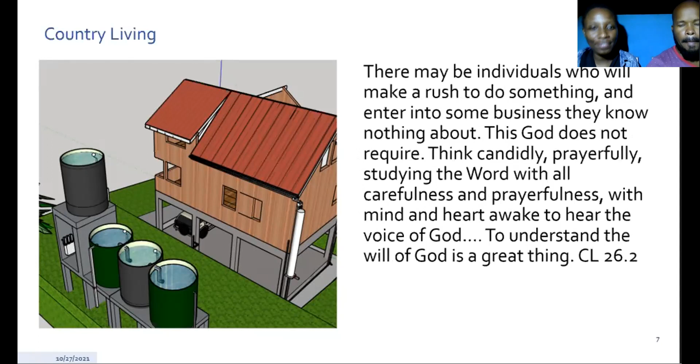So we see here that you should do the planning necessary, so that when the time comes, we have things already set up in place. One of the passages I love is this: not a move should be made, but that movement and all that it portends are carefully considered.

This is why we're doing this session as well. We want to show people there's a lot to consider when moving to the country. It's not just let's move and all is going to be all right, God is just going to miraculously provide. No, we need to consider all the movements and all that it portends, everything that it entails.

Rain harvesting is one of them, so let us start considering it. Let's get into it now. You have me in suspense. All right, so let's get into it.

One more passage before we go. More and more as time advances, our people will have to leave the cities. For years we have been instructed that our brethren and sisters, and especially families with children, should plan to leave the cities as the way opens before them to do so. Many will have to labor earnestly to help open the way.

And we have said, yes Lord, we want to labor earnestly to help open the way for families to move out of the city into the country, into a place where, let me tell you, that location we were just at, that river, we can stay there for days. That's why we were late to get home again.

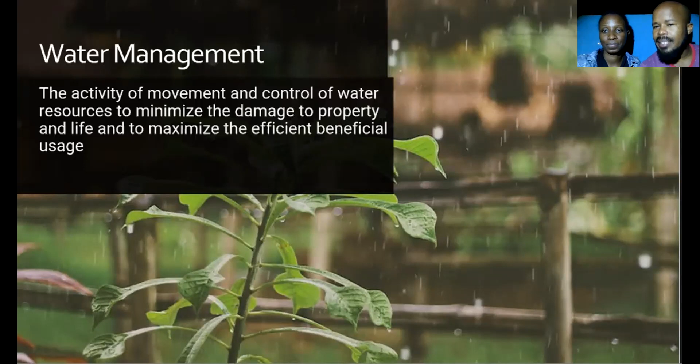Water management is the activity of movement and control of water resources to minimize the damage to property and life, and to maximize the efficient beneficial usage. So use it for your benefit and mitigate the damages it may cause if left on its own.

Water is extremely important, and that is why we need to observe it. The first thing we stated is we need to observe how the water operates on the property so we can know how best to make the interventions or changes we would like to make. For example, we looked at the entry points of the water, the exit places, where it's collecting if any, whether it's slowing down in any area, drying quickly in some areas, or moving quickly.

And if it's moving quickly, we may find erosion. So these are some of the things we looked at. One thing we observed is that when water moves too quickly through a property, you can have erosion, and we do not want that. Instead, we want it to slowly sink into the soil. This is one of the things we saw yesterday. When we assess what we're noticing on our property, we have to assess our water needs.

How much water do we need to do the things that we need to do? Is it only for recreational purposes, or is it only for agriculture? Do we have an industry that requires a lot of water? We're going to be looking at aquaponics tomorrow, so then we can adjust our understanding of how much water we would really need. This is something we have to take into consideration as we are observing the water on our country properties.

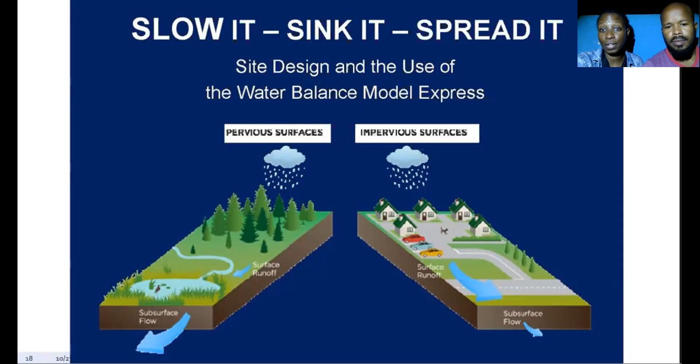So as we realize this is what we aim to do, the reason this is our aim is because we would like to have green forests and green gardens. So we can store the water, as we said, under in our aquifers, or we can store it above ground. And that's what we're going to do today.

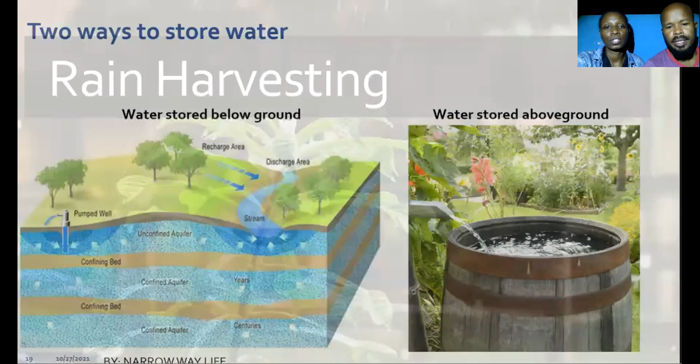So today we're going to look at rain harvesting, which is storing water above ground. Yesterday we looked at storing water below, which were our swales, where we can allow the water to travel and spread on the land through the contours, able to sink in to more areas than if it was just settled in one particular area. So tonight we're going to look at rain harvesting.

So I just put the definition. Rain harvesting is the collection and storage of rain rather than allowing it to run off. It's the collection of rain instead of allowing it to run off. Rain harvesting is the collection from a roof-like surface, and directed to a tank, cistern, deep pits, well shaft, borehole, or aquifer, taking the water and storing it for your usage. That's basically the idea.

Now, it's different from stormwater harvesting, because stormwater would mean that the water had already moved across the land and maybe even done damage to some of the places. So, one look at rain harvesting.

Now, in harvesting water from the sky, you can also harvest dew. There's dew harvesting as well, in places that have deserts. However, sometimes in the day, maybe dawn and dusk, or in the evening, there is dew that's moving around. So there's a way to harvest that dew.

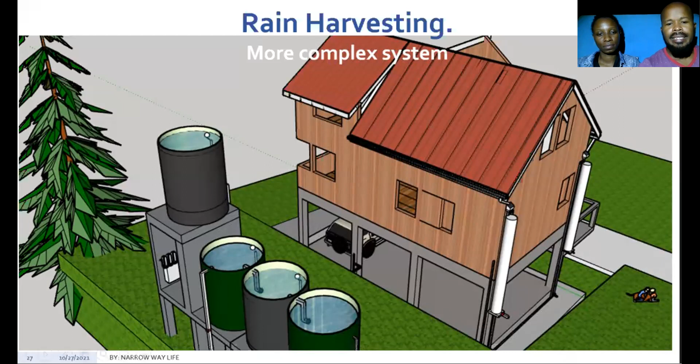So here's a simple diagram of a more complex rain harvesting system, and I'll explain it as we go along. Here we have the roof, and here we have a leaf eater or leaf diverter. Then you have a first flush system - that's where the bulk of the dirty water gets diverted - then you have your storage tank, and you pump it through a filter into your house. It's a little more complex than just guttering, but we can get even better systems than that.

Let me explain the parts of the rain harvesting system so everybody can understand. I won't explain a roof, I believe everybody knows what a roof is. If you don't know, this is a rain gutter.

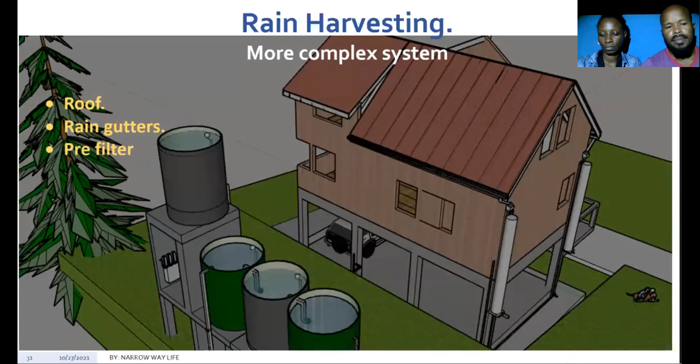Now, a pre-filter - this is a picture of a pre-filter. The benefit of a pre-filter is, one, it shuts your system, so then you have a closed system where nothing other than water or tiny particles can get in - no mosquitoes, no leaves, no debris. That's a closed system. The pre-filter comes after the rain guttering, going in order - after the guttering you have your small downspouts, then the pre-filter is the next thing. You could have covered pre-filters or pre-filters that are uncovered.

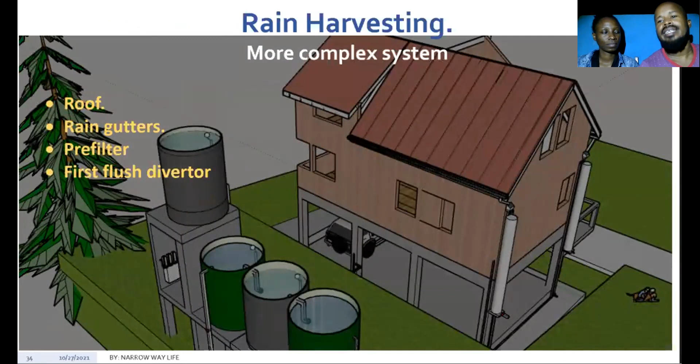So the next part of the system we want to look at is the first flush diverter - I'll say it again, a first flush diverter, and it looks something like that. What is it supposed to do? Divert the first flush. So what is in it?

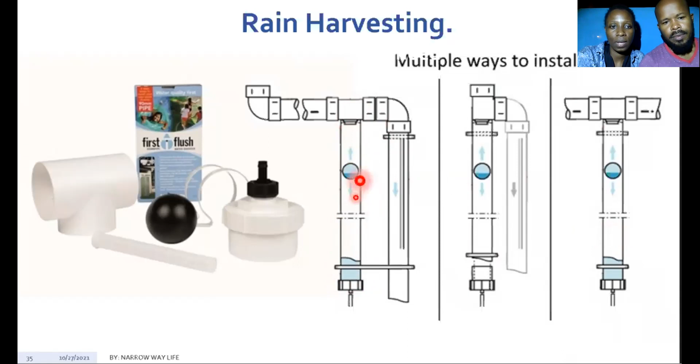So if you understand the concept here, the purpose of the ball is to block this opening when this chamber is filled. So it has to first allow water and debris to go around, but it's supposed to block this at the end. That's why I like this picture more, because it shows the ball floating.

But that chamber, you need to be able to drain it from the bottom, man. You need to be able to flush it. That's why they call it the first flush system. So every time it rains, you need to be able to flush off that system and get that water out.

And this is where it comes in handy for your gardening purposes, because that would be a nice little compost tea with your leaves. Well, not maybe compost tea, but it's nice water for gardening, because there's a lot of minerals in there.

So next you would need... One question: why do you have the drums that distance, like about 15 feet or 10 feet, from the house? Oh, from the house? No, there's no reason why I have it that far from the house. That's just how it's designed for what our home kind of looks like. You just don't want it resting on the wood of the house, because it would cause mildew to build on the walls.

So the distance is your choice. You just don't want it to splash water onto the wood. That's about all. And the pipes for it are actually running underground, but we'll get to that. We have a 3D demonstration of that, so you're going to get to see it in detail. But thanks for the question.

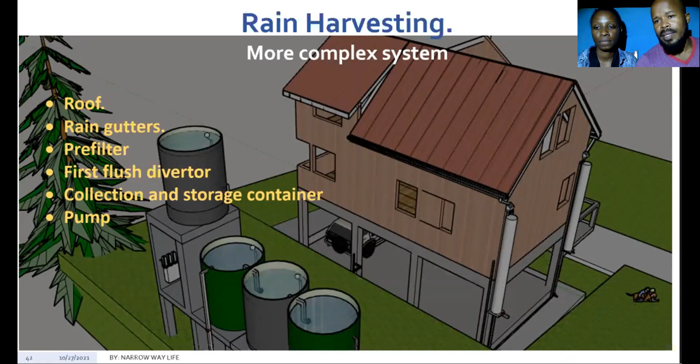We need a pump. If you're going to run micron filters, that's coming up next, you need a pump to be able to run the water through the filters, because gravity would take a long time to get the water through that filter. Also, if you allow gravity to do the work for you, that means the tank after the first tank would have to be lower. And if you lower the water, then you have problems using gravity to get it where you need it to be. But we'll get to that in a while.

We also have a well pump—yeah, that's a well pump, where the bottom of it is submerged in water. It hangs down all the way into the water, and when you turn it on using the wire, it pumps the water back up through a hose, so you could have water. That pump can be submerged in the water.

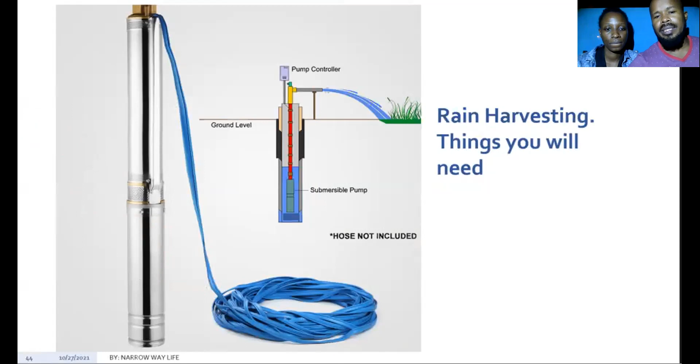So why do you need a pump? You need a pump if you are going to run micron filters—filters that take out the things you cannot see. We'll get to filters in a while. You need a pump to be able to pressurize the water through the filter, and the better the filter, the more pressure it takes to run the water through. There's ceramic filters, and micron filters, but we'll get to that.

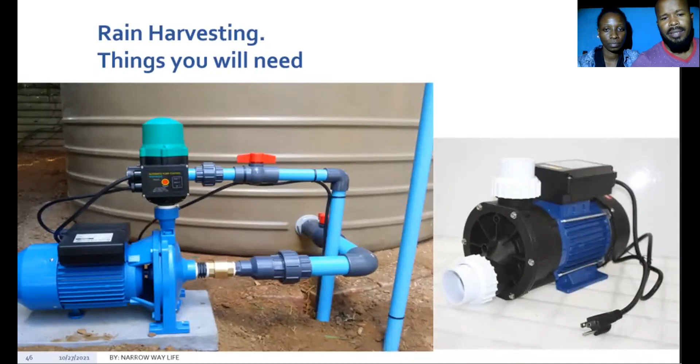Now, in your rain harvesting system, what's that? I'll look at that.

It has a filter in the straw, so when you drink the water, it filters it through the straw. That's just one of the types of filters that they provide.

So now we go to storage tank, which I already explained. The most important thing about a storage tank - well, two things I must say, but I think we don't have that problem anymore - you need a special coating of plastic that they put inside the tank. However, if you could get stainless steel water tanks, that's ideal. However, I've never seen it in St. Lucia.

So you do with what you have. You do not say, I'm never going to drink rainwater, I'm never going to harvest water because I can't get what is ideal. Until you get what is ideal, use what you have, because it's better than pipe water anyway, since the pipe is actually made of metal that corrodes. Other than that, you need your pipes and fittings to connect those individual parts together.

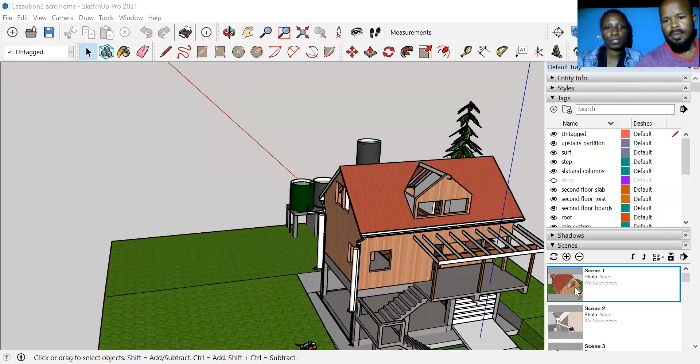There we go. Okay, so can everybody see the screen? Jump in. How would you know - can you see them? Yeah, you can see this. Yeah, you can see the hand?

All right, so I'm going to explain the system and you're going to see the setup and all the connections in between. Ready? So as we explained, we start with the roof, and then the water gets into the gutter, and from the gutter we have the downpipe, and the water then goes through this pre-filter.

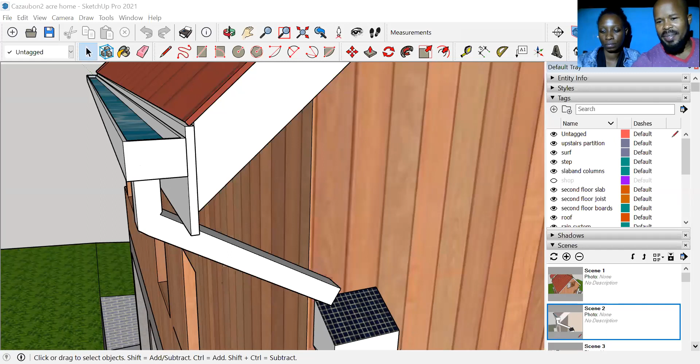Can somebody tell me the purpose of the pre-filter? Oh, we have a hand. Okay, go ahead. When I think of the purpose of the pre-filter, I think it's to remove all the trash and debris. Yeah, the leaves and stuff, debris. Okay, right, wonderful.

But I wanted to mention before, when you were questioning stainless steel - a stainless steel drum is like buying a house, right? I didn't know that. No wonder we don't have it in the Caribbean - it's very expensive.

Right, very expensive. And with the plastic drum, if you're worried about chemicals, in my estimation the charcoal filter would be ideal, applicable in removing 90-odd percent of whatever you might be concerned about, rather than having alkaline water. The UV filter would have to be changed once a year.

Right, so I'll just make note - on your roof, if it's a steep roof, the gutter would have to be wide enough, because your collection will run off and run over and not go into the gutter for such a steep roof. And let me add, a steep roof stays clean for longer too, because debris wouldn't stay on it. But I'm explaining that when you're building with a steep roof, you have to go with broader gutters so you catch the excess water into your tank and get the drippings in the tank.

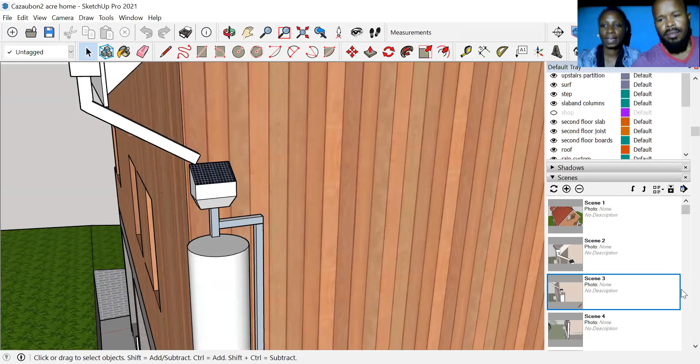All right, very good. Yeah, thanks man for sharing, bro. Thank you for that. I see you're really into country living, so I like that. Thank you, I set up my water system, but I don't... Oh nice, sophisticated how you set it up. Okay nice, right. All right, yeah I'm good. Any other questions?

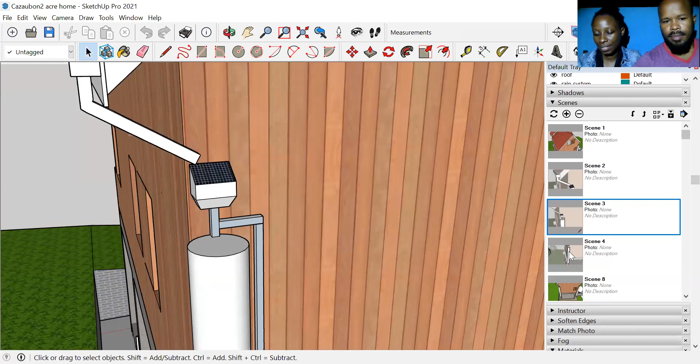So on this roof, I have two systems, one on the left, one on the right. They're both connected to each other. However, I treated the two sides of the roof separately, and I gave each of them a filter, because redundancy is better. If you have only one filtration system, since the roof is the source of the water, and that one pre-filter system goes down, then my entire water harvesting operation is out. So I have two of them.

Here you see the example of a small first flush filter. I have a way bigger first flush filter, because I want to be able to take a lot of the rain and a lot of the things that I don't want to drink out of the system.

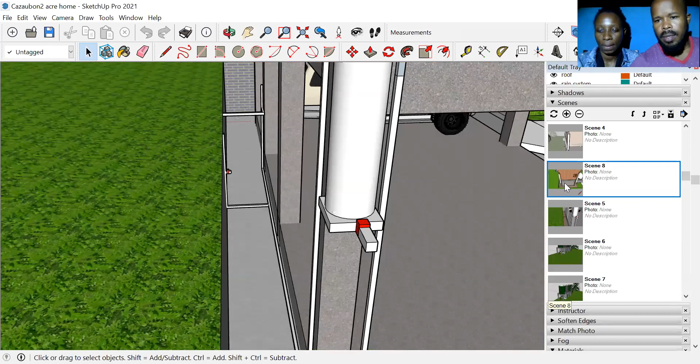Can you repeat the question, please? Or you could post it in the chat. Okay, no problem. Okay, yeah, it was a mistake.

So now that we have the water in the first flush system, we need to get it out. Here's the first flush system right here. If you can see the mouse, it's on both sides of the roof. However, the pipe—let me zoom in there.

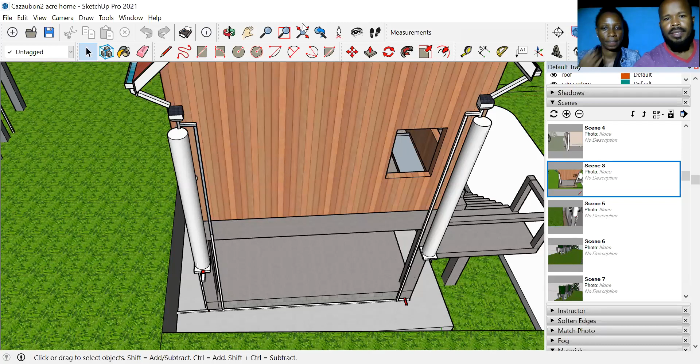Right, so they're all connected at the bottom there. Now, it is very important to be able to shut off every part of the system for whatever maintenance you need to do. These red symbols are just a symbol—I didn't want to go through the whole hassle of drawing an actual pipe head and everything, that's a lot of work. So every time you see red, that is a valve, to be able to shut off the system. So if I need to work on the tanks, or cut a pipe here, I need to be able to prevent the water in the tanks from backing up and coming back out, so you need to have those.

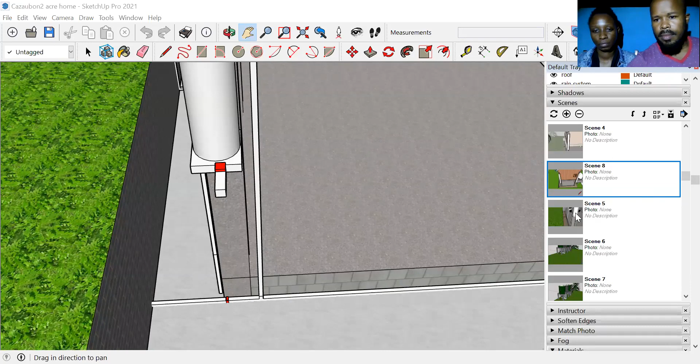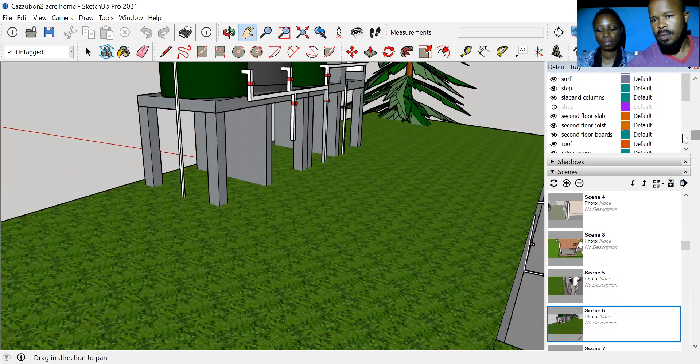You see where it's critical? You don't want those red lock-offs to be on your main tank for flushing. You need the metal ones, because these plastic ones tend to not work so good after being in the sun. But it's still according to what you can find where you are too. I'm just saying the main part, the one that comes out of the tank to feed the rest of the system, you want to at least try and get even one of them as a brass lock-off. It's a bit more expensive, but when you consider that if anything should happen, these plastic ones don't work as efficient as the brass ones, especially if you have thousands of gallons of water there—a lot of pressure, it's important.

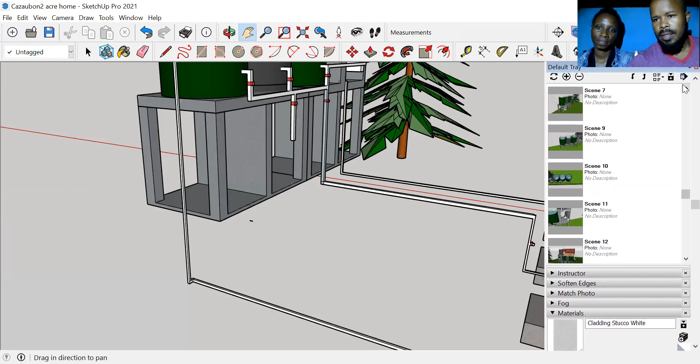Right? And another thing too, where did I go? Another thing with... oh, it missed me. When I get it back again, I will tell you. All right, no problem, thank you so much for sharing. It missed me a while ago. All right, but it will come back.

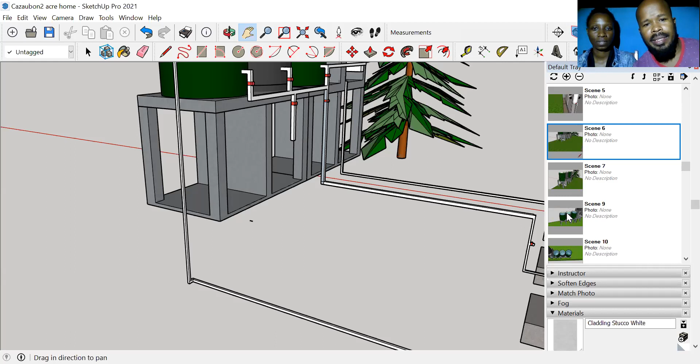Okay man, so from the house we have a first flush system. This is actually the ideal system that I want. However, our system only has 2 tanks. So then the water comes into this first tank. Now this water is still not drinkable—yes, it went through the pre-flush filter, but there's still stuff that would have gotten through. So this first tank of water is what I would use to water my garden, wash the vehicle, flush the toilet if you have a flushing toilet, and do other things that don't require clean water.

Maybe even wash clothes with that water. So that water goes into that tank. Have a view from up there? Yeah, from up.

So the water in that tank, if you look closely, the water comes in through the tank, fills up, and I only take water from the top. If you notice, when the water fills up and gets to the top here, I have to be able to show that. Let me see. Here we go. Yeah, that look.

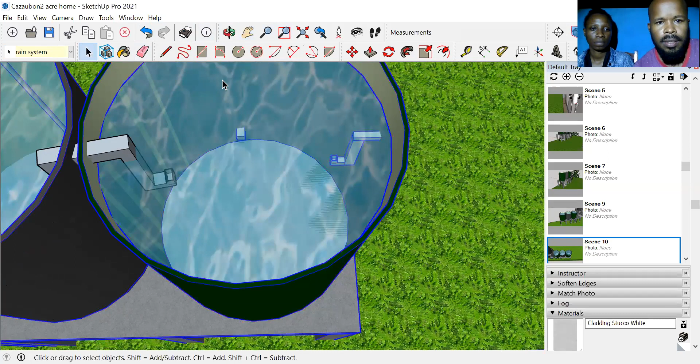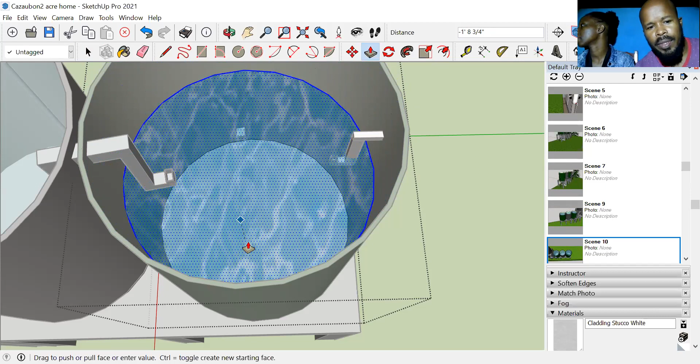So when the water fills up, it will continue to flow into this tank until it gets to where the water is no longer able to go into the system. As long as the other side of it is submerged under water, the water will continue to sink down until it gets there. Now, I can only use the very top of the water to go into the tank.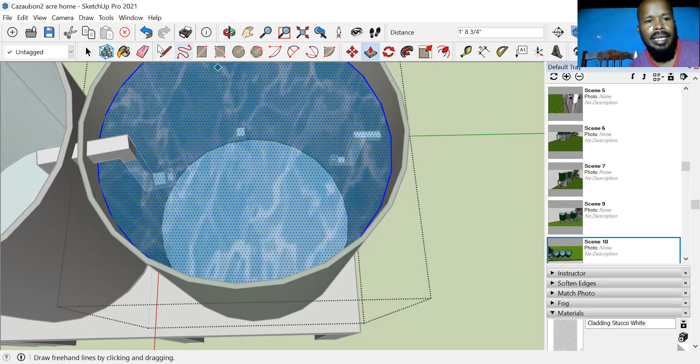So whatever came into the first chamber, whatever debris made it through would settle into the bottom, and that I'll use for the garden. So only the cleanest of the water when the tank is full would make its way into the second chamber on the other side.

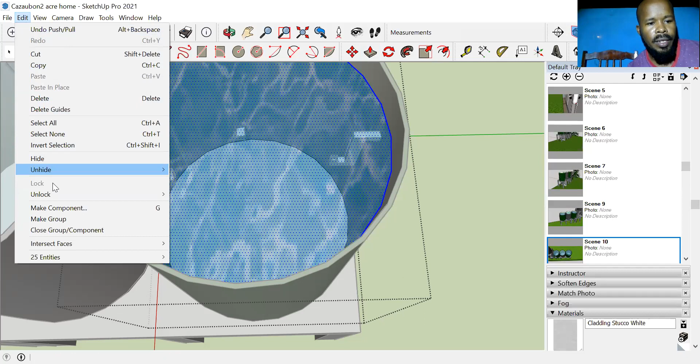So that is called sediment filtration. You allow the water to settle, the sediment sinks to the bottom, the cleaner water stays on top, and the cleaner water then can move over to the other side of the rain harvesting system.

So let me turn it back. That water now, I can still use it as long as I keep this chamber and that one closed, then I can drain the water through the bottom and use it for whatever I want. If I open all of them, then I will be able to allow the water to flow freely from one tank to another.

So I keep doing the sediment filtration from one tank, taking from the top to this tank, taking from the top. By allowing it to settle, the water that gets there is already cleaner.

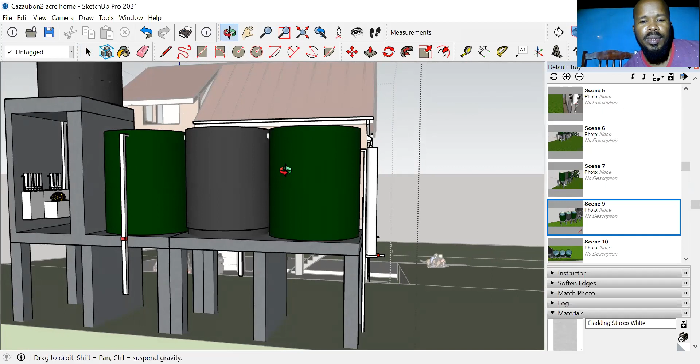Now, the other thing you want to do is harvest the water as close to the gutter height as possible. The higher up you harvest the water, the better able you are to distribute it over the landscape. If you harvest the water really low, outside of having a pump, you cannot use gravity to get the water higher than you store it. So you want to be able to store that water as high as possible.

Based on the height that I have the water here in the house, I can use the water for shower, I can use the water in the bathroom. That's actually how my system is. If I store the water down here, then I would need to use a pump to get it up. So you want to harvest the water as high as you possibly can.

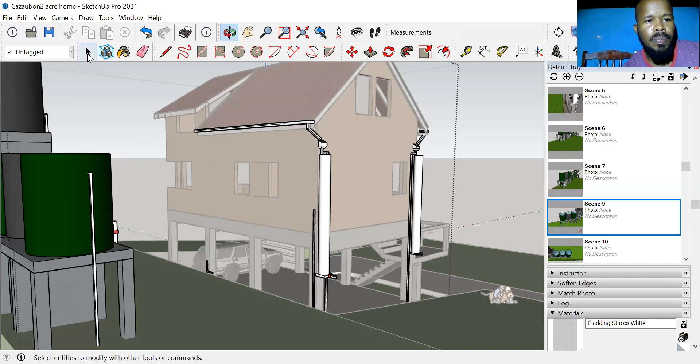So after doing all that filtration, at this final level, that water is drinkable. This is the water I've been drinking for 7 years. Taking from the top, allowing things to settle, it makes its way to the second chamber, then fills up, things settle at the bottom, the top is cleaner, it moves its way to the third chamber, and this is the water I've been drinking for 7 years now.

And I feel I can actually taste my water compared to the water you get from a pipe. So...

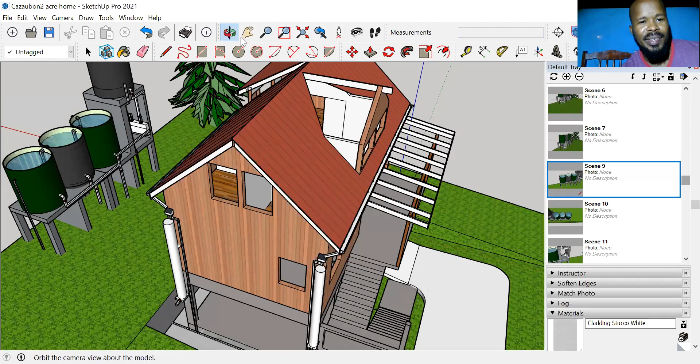But now, if you want to filter it further, this is the water you use, and you pump it through your filter. If you pump it, then you can store it even higher than you previously had it. So you run it through your filters, and then you can get to store this water higher than even your roof.

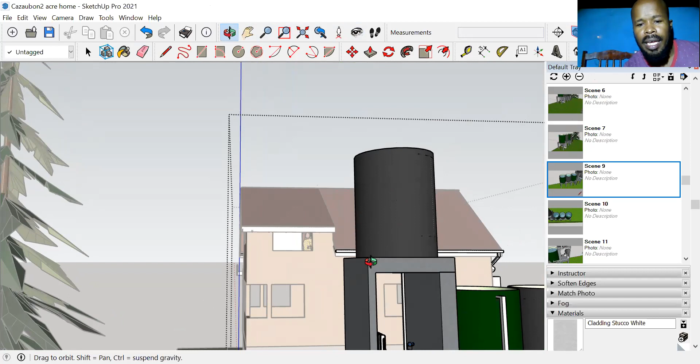Now that I'm storing the water, this last chamber, higher than the roof, I can use this water upstairs in the house using gravity. I only need the pump to push the water through the filter and to store it. So that chamber can remain full of drinkable water at all points. This is like my reservoir, the water you only run for drinking.

I wouldn't use this water for the shower. It cost me a lot to pump it up there with my solar panels, so I'm not going to use it for anything but drinking. If I have to bathe, I'll use the water down here. If I have to water the garden, I'll use the water down here too.

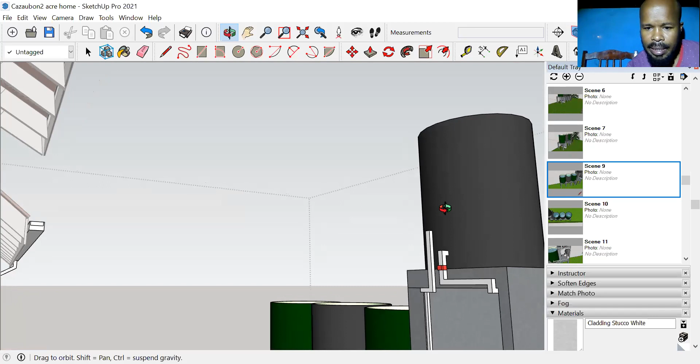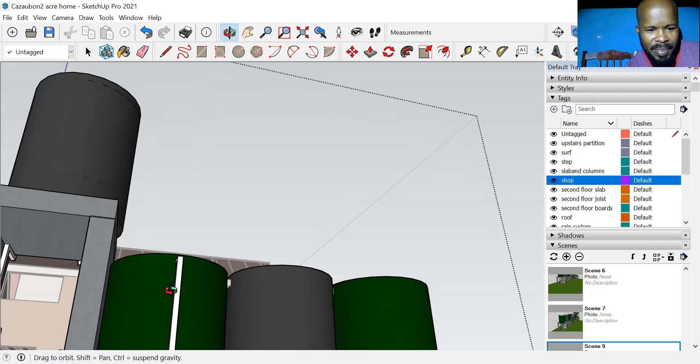The only thing your water system needs after this is to be able to flush itself. I had a flush thing on board, maybe it came off on the layer I took out, or maybe it was on the ground layer. So then you need, oh no, that's not the place that needs to flush. It's this one that will flush, because that one cannot flush. That one, whenever it's full, the pump shuts off. So this one here has to have an overflow.

So the more it rains, the cleaner your system gets, because the water is able to move. Sorry about that, my laptop froze up. The water is able to come fill here, the cleaner water goes there, and then the system keeps flushing itself. I have a thing there, but that's not necessary.

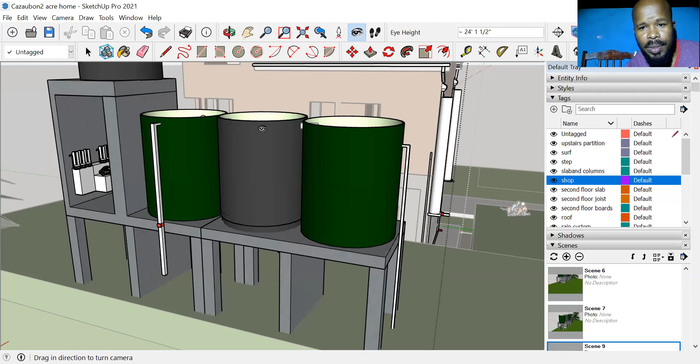The only thing is make sure you have a mesh, and make sure your tanks are properly covered. For demonstration, I have the tanks uncovered, but normally you'd cover them so that no mosquitoes, no frogs, no toads, nothing can get into the water. Now, the other thing too, if you notice, I have it here.

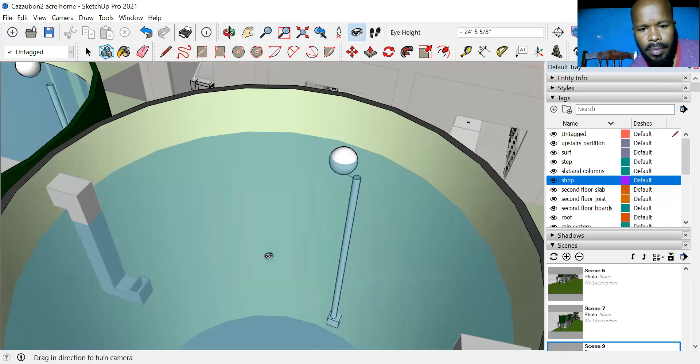I only drink water from the top. So inside the tank there's a hose here. The hose is fully extended, and the hose is on a flotation device. So I'm only drinking from the top, I never drink water from the bottom. The cleaner water is always on the top because the sediment goes to the bottom.

So by only taking from the top, I ensure that the water I use is the better of the water. The water from the bottom, I have a separate pipe for that. I use that for washing the vehicle, washing the house, and washing whatever I need to wash, even watering the garden.

Any questions? Hello baby, yes baby. Oh, I can't see hands. No hand? Okay, one hand, go ahead. Yeah okay, let me get it.

You say use a hose. That hose can be like a PVC pipe too, right? Yes, it can always be a PVC pipe as well. The only thing about a PVC pipe is it will not be able to go up and down with the changing of the water surface. So you'd have to just store it at a certain height, and then you only use water above.

So if I was to use a PVC, I would have the pipe a little lower, maybe halfway into the tank, so that I only take from the top. But then I would need another pipe so that the water in the bottom, the dirtier water, I can get it out the system. So especially if it rains a lot and I see all my water overflowing, I would open the bottom pipes. The water that has the dust and stuff in it, I would flush it out, so the cleaner water would be what is in the system. That way I can flush the system.

And if I'm not satisfied with how it's flushing the system, I can do it manually, let me just change the camera here. My laptop, the laptop can't run the software, let me tell you. I actually have a lot of information on that software for that. So, okay, here we go, the laptop keeps freezing. Let me change, I'll go to the front. That's the front, yeah, that's the front.

So if you notice these pipes... oh, I drew it wrong. Those pipes are supposed to be water that goes to the house. It's not supposed to be connected to each other. However, you'd need another set of pipes from the bottom, as low as you can, not the very bottom, but the actual height that the pipe comes with, the drums come with. That height, you'd be able to flush the system by simply opening it, because the water in the bottom would be the first to flow out.

However, for the water that goes to the house, you want the water that is on the top. That's the cleaner water, not the very surface, because the very surface might still have little things floating. Possible, highly unlikely, but possible. You want the water that is maybe about 6 inches below the surface. So a hose is great because you could actually set the hose to hang 6 inches below the surface.

I see a second hand. So you're saying that the hose will move with the changing water level? Yes, as the water changes, the hose will move. So if your system remains full all the time, then you're always getting the best water.

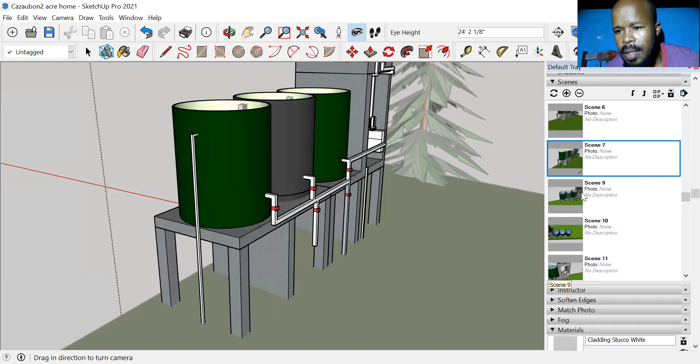So if you could go back to where you were showing inside the tanks with the ball and the hose, what's the purpose of that? Okay, the ball and the hose is to ensure that you're only drinking... remember we're doing rain harvesting, right?

So you want the best, cleanest water, which is the water at the top, because whatever particles made it into your system would have settled at the bottom. So having a hose with a flotation device, it doesn't have to be a ball, something floating, keeps it even if the tank came with an entryway at the bottom. It ensures... well, I guess I could circle it. So the hose would ensure that you're always drinking from the top part of the tank.

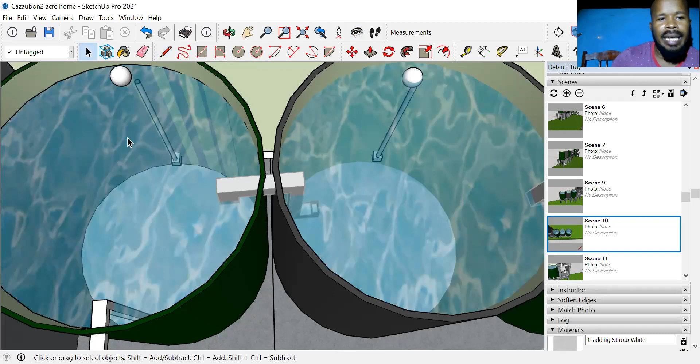So even though, oh, you have it. Okay, let me just... now with the software, if I lower the height of the water, the hose will not go down because the software is limited. But if the water was really low...

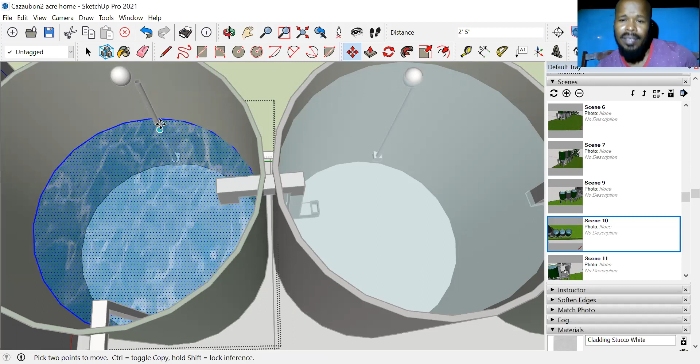Like he was suggesting, a pipe. With the pipe, when the water gets really low, then the cleanest of the water would be out. So that's one suggestion, that you could have the pipe say halfway or three-quarter way, to ensure that if you're using the water for drinking, that will be the very last tank. So if you're using it for drinking, you're still only taking from the best the tank has to offer, which is the very top of the water.

Wait, so the hose is open like a straw to take water from the top? Say that again, what's happening there? No, a hose — the software is limited. I cannot do it, it's not animation, so I cannot make a hose that adjusts if the surface of the water drops. So in our imagination, you have to imagine this is the hose.

I'm so sorry, yeah, you want to help us? No, but that's okay. I think I understand what you're saying. As the water is dropping, it's like a straw, right? So the water will be lower than... yes, so it's like a straw. Yeah, it's like a straw.

Okay, because what happened, I thought the ball was connected to the top of the hose, so I was trying to understand. Yeah, it's connected, it is connected. It is connected because the ball is what controls the height that the hose is below the surface. So the software cannot do it, like I said, but when the water surface drops, the ball will drop as well. Right. So the ball is for you to see the level of the water, or no?

It's for the just to keep the hose... how do I explain it. Like if there's a ball in this, when the surface of the water goes up, the ball would go up. So then by having the hose and the ball at certain heights, I ensure that I am always taking water from the top. So I keep the hose floating. So when the water level goes down a little, I'm still only taking from the top of the tank.

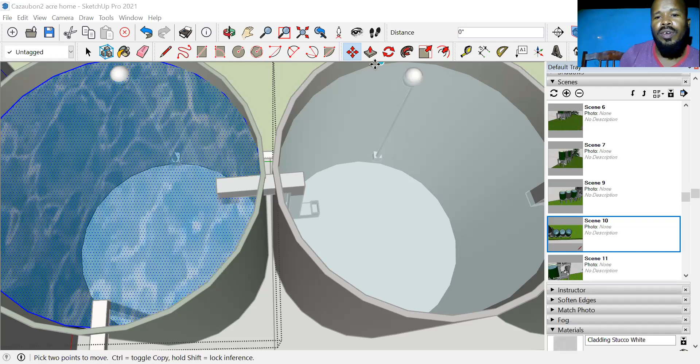Without the hose, whenever you open the pipe on a water tank, you're taking from the bottom. It doesn't even matter, if you just install the tank however you buy it, whenever you open the tap, you always get the water from the bottom, which is the worst of the water. However, you want to be able to take the best of the water, which is at the top. So you put a hose in there, connect it, and the hose and a flotation device will ensure you get water from the top, which is the best of the water.

If you look into your tank, you'd see that the water actually changes color on its way down. Even if you have no filtration, the cleaner water is always at the top, and there's always a little muck in the bottom of the tank, especially if it's been there a long time. Because the way we install tanks, they are not designed to flush. The tank just has entry and exit, nothing for flushing. You would have to manually add something to flush the system.

I could be on the same line if you want. Yeah, but I love the question. I hope I answered your question. Yeah, I understand the cleaner water is on top, I understand that part. I'm not really too sure what's the function of the ball per se, but I understand the majority of what you're saying.

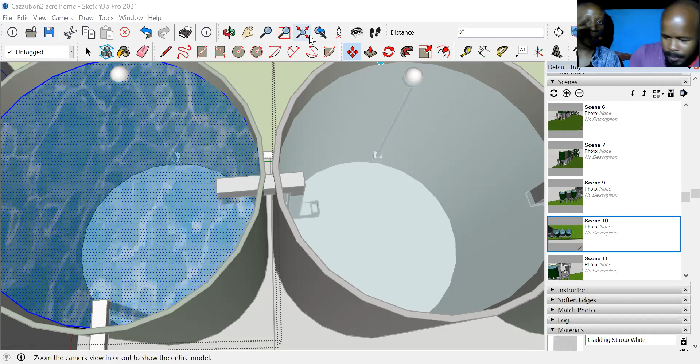But the hose being on top, so you can clean. Yeah, the ball has a rope on it connected to the hose to float the end of the hose, because the hose can't float by itself. Similar to the toilet bowl - the ball has a function similar to the toilet bowl. So when you flush the toilet, the float drops down, and when it's filled, it goes up.

But that's a different function. It's just that with the hose, the ball keeps the end of the hose up, always up. So if you just drop the hose in the tank, the hose will just fall to the bottom. It doesn't even matter - I didn't know the ball was floating the hose, I thought it was like a piece of PVC.

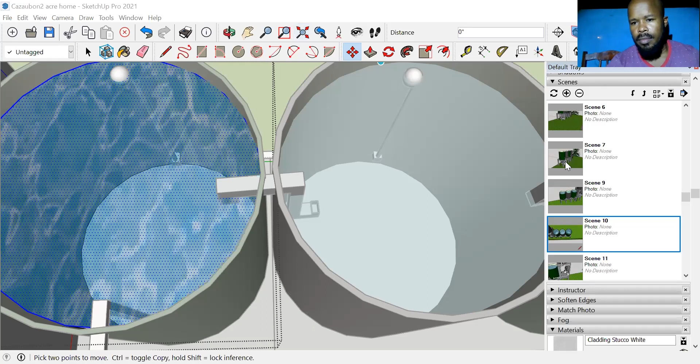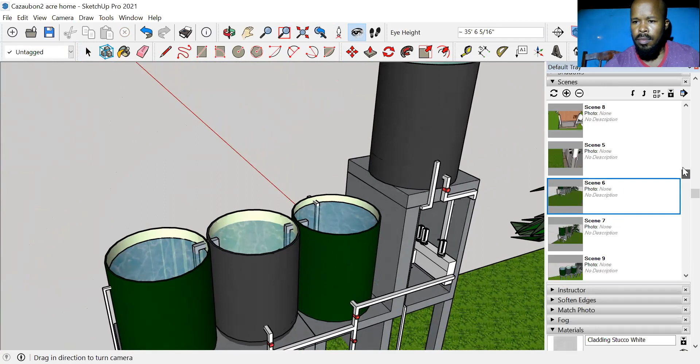Appreciate there's some really solid stuff you're presenting here, and I'm thankful for it. I have one question that has to do with backing up a little bit, when your water goes through your pre-filter and first flush system. My question, as it relates to this diagram, is when it comes out of the first flush system, is it using purely gravity to go into the first tank that you have set up there? All right, I like your question.

So then the water fills up this first system. The water that fills up the first flush does not find a way into the tank, I'll say that first. Now I'll draw a level line. Gravity gets the water into the tank, I'll show you, water stays at the same level. Just now, let me change the angle of the camera so everybody can see.

So to get into your first tank, you use gravity. Just let me change the angle and I'll draw a level line. So from here, I'm going to draw a level line. When it turns red, it's level. Just now, hold on... okay, that's red.

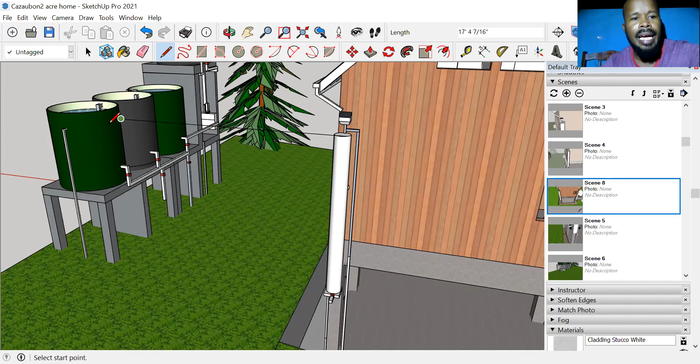Wait a minute. Yeah, so this is level. The red color disappeared. So as long as the water is higher than over there, the water will naturally flow into the tank, no matter how far it runs. This is just how water operates - water sits at the same level. You don't need any pump to move water from here to there, as long as this place is higher than over there. Now the water will never fill higher than this point here.

As long as this point, where I just put the new line - my software might be crashing on me. As long as the pre-filter, if it's properly sealed, is higher than your water tank, the water will move into the tank. You don't need any pump at all, no matter how far away it is. The only thing that can prevent it is air, but if your pipes are big enough, the air will come out - it's negligible. Only for small pipes would the air matter. I hope that answered your question?

Yeah, surely man, thank you very much, appreciate it. All right, that's just the beauty of gravity. Gravity will get it there for you. That's a free resource, yeah.

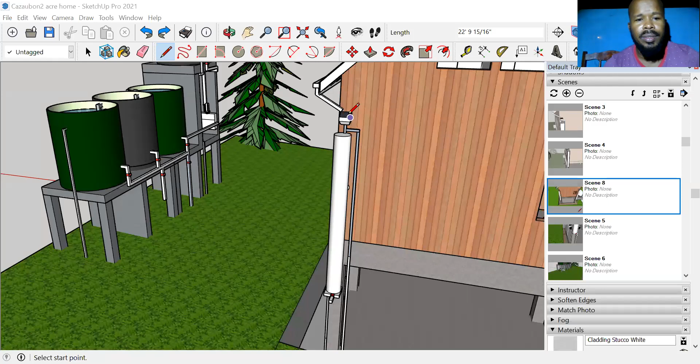But it's very important to have these chambers perfectly sealed. The system has two openings: the top of the first pre-filter needs to be perfectly sealed at all times, otherwise mosquitoes will fly their way into your system. And if you have mosquitoes in your system, then the water is not good. The top of the tanks is another place that needs to be perfectly sealed.

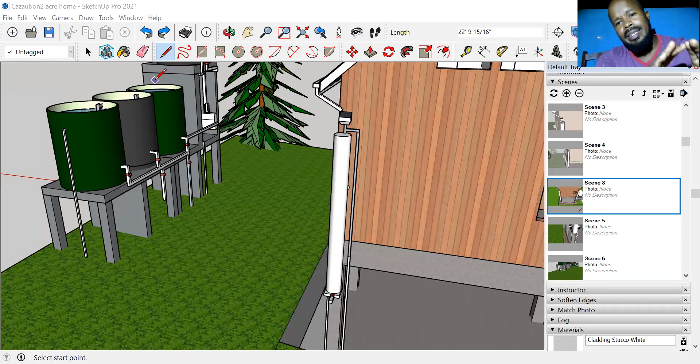Don't trust the tank tops that screw on to be absolutely best. For the ones that just rest on, I would still put a wire mesh inside, across the top of the lid, and put weight on the lid to ensure it doesn't come off. Some tanks, if you use the actual locking mechanism they make, it may make the lid sit a little higher than it's supposed to. So I'll put weight, and mosquito netting under the tank lid to cover it.

The other place you need to keep covered is the other exit, the overflow. When it rains a lot and all the systems are full, the water needs to go somewhere - that's this pipe here, your overflow. Put a nice drain or get it into your pond or something - that was for explanation purposes. That bottom end, I would need to have mesh on it.

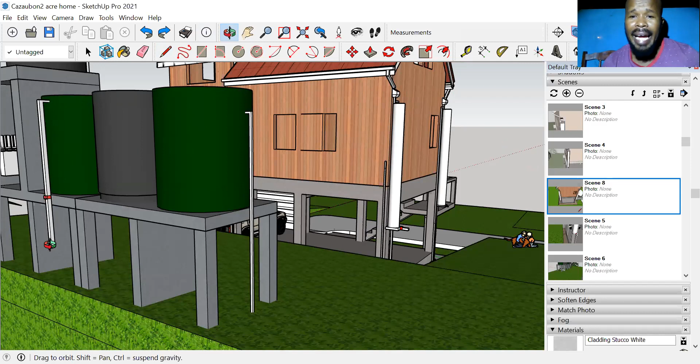I was supposed to take pictures of my system because I didn't buy a lot of these things - I made a lot of them myself. Like my pre-filter, I used 6-inch PVC pipe, scotch tape, and mosquito netting to make it. I cut the pipe at an angle and made my pre-filter. So creativity is your friend.

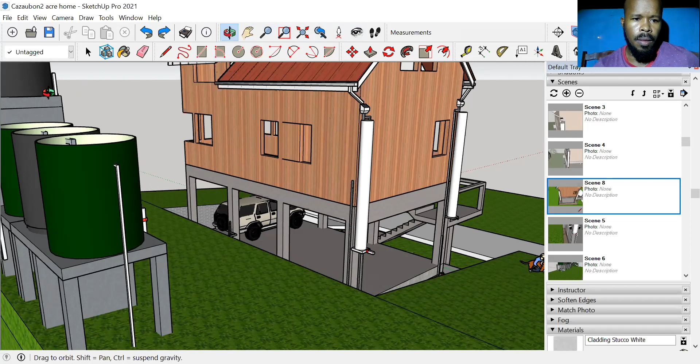I realized, based on my playing around with water, that when you pipe from bottom up - just stretch your mind - if you had a pipe that comes from that top level, the highest tank, and you have the pipe that goes across to the house and to the shower, you'll get better shower pressure than if it has to go down and then come back up.

Yes, yes, yes. Oh, and the other thing I must add - I forgot to mention that if we're using gravity to move the water around, we need bigger pipes than the half-inch or three-quarter inch pipes. You need one inch, might even be too small - 1.25 inches and up. So your plumbing in the house would have to have bigger pipes than normal, because three-quarter inch pipes are pressurized water, but with gravity flow you need bigger pipes to get the same amount of pressure at the faucet. I forgot to add that, so thanks for reminding me.

Yes, and so if you get the pipe straight across from the bottom, you will have more pressure for sure than having to take all the bends that they would take. You're correct about that. Cool. Yeah, because every bend would reduce the pressure a little.

I guess everybody understands, or does nobody understand? Yes.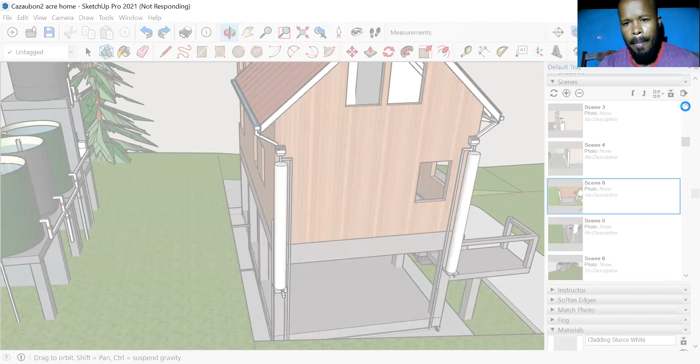My question is, I came in late, but just listening to what you're saying, how do you keep the water from forming algae or any type of bacteria? Like, how do you keep your water clean? I know you keep saying that you just take the top part of the water that flushes into the other containers, but doesn't that form algae or bacteria?

Yeah, I like that question. Algae for sure, algae is light. If light gets into the water, the light will cause algae.

Bacteria, I don't know, but I'll tell you what I do. I pay attention to the water. From time to time I'll look at it, smell it, taste it, and test it. If the water quality is getting questionable, then I would add...

Oh Lord, I forgot, there's a measurement of bleach to water ratio. I would add a couple drops of bleach—I forget the exact ratio—but you can use bleach to kill off some of the bacteria in the water. I would do that just before a rain, so if I know it's going to rain, I'd add some bleach to kill off whatever is there, and then when the rain comes, it would reset my system.

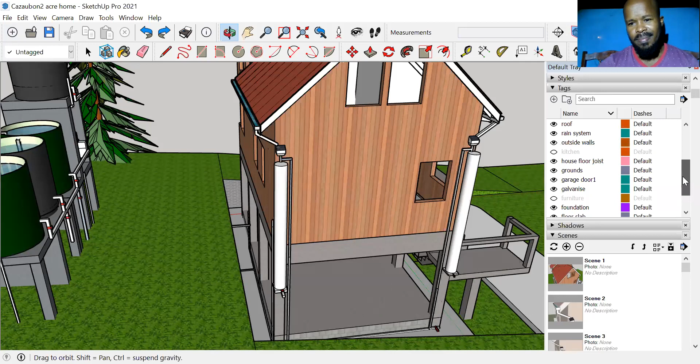So, one question: you're saying that these small tanks, you use the small tanks to do your filtration. What do you call it, filtration? You use those three barrels that you have, going up and down inside there.

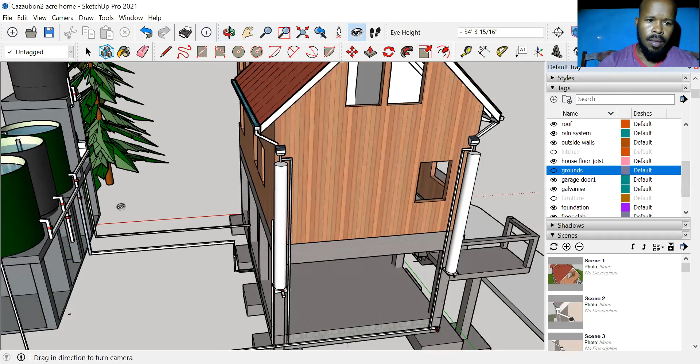Yeah, you'd want that for like 200 gallons or so. No, these tanks are about 800 gallons. Oh, the bigger the tanks, the better. No, that's not 200 gallons, that's not the blue tanks, that's 800 gallons. The system I have is one 800 and one 600.

And I want, you see the last tank up there? I want to get a 1,000-gallon tank, because I want the cleanest water to have the most storage. These smaller tanks, if they empty out for gardening purposes, that doesn't affect me, as long as my big tank with the filtered clean water is always full.

So then, yeah, I thank you for telling me that, I didn't mention the size of the tanks. So the bigger your tanks, the better. If you could avoid the little blue gallon containers, use them for flush if you have to, or for extra storage if you have to. But for your rain harvest system, you want big tanks.

You want to assess the size of your roof so that a light rain doesn't overwhelm your system, and the heavy rains have a little work to do to fill your system and then flush it. That will also depend on your water needs, how much water you use. But trust me, you will never have too much water stored, because you never know what is coming in the pipeline or what the future will be like. So the more water you can store, the better.

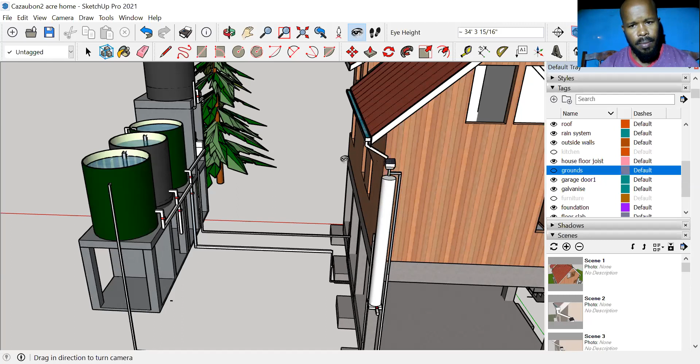Okay, all right, so I'll ask my question now. Using your system again, here's the model. After the third tank, you have a pump that takes it up to this higher tank, right? Yeah. You discussed tank pumps earlier on, and I'm guessing in this system here you're using an electrical pump. Yes, but what are your suggestions?

Because I'm thinking off-grid, and maybe electricity may or may not be an issue. But my question is for manual—if you're going manual, what would you suggest to pump it up to the high tank? Yeah, that's why I love questions, because I actually forgot to put that in the slide.

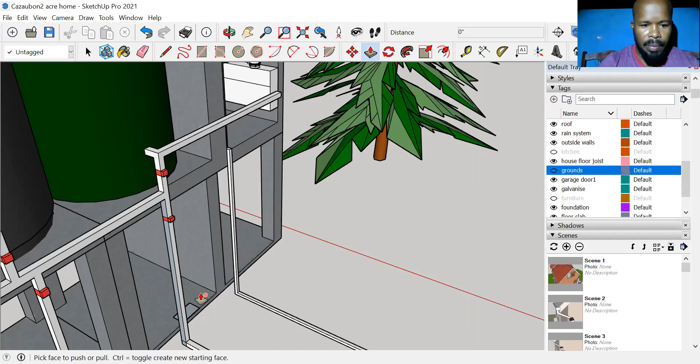So then from this tank, instead of having it go to a separate filter, you could have a filter on this line here. So let me just draw something there. So then you could have a filter— I'm just going to do a makeshift filter, guys, bear with me. Could have a makeshift filter, say a charcoal filter or something you build here. So the water would run through the charcoal filter, perfectly sealed, or sand and charcoal filter.

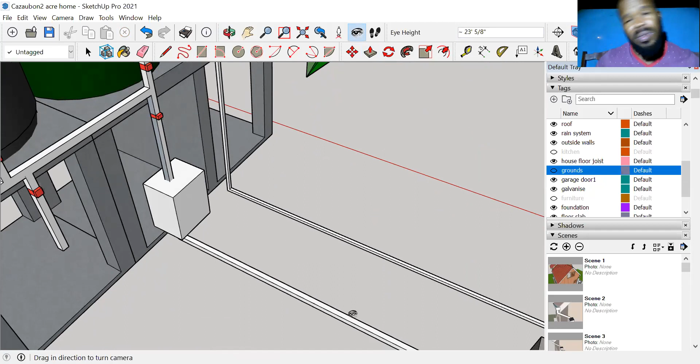The water would run here and through the pipe. Now to run the water through the charcoal filter, then you use the pump in your house to get the water there quickly, or use gravity and have a separate storage tank, but then you'd have to be able to pump it because that water is now lower than the house. Except if you can perfectly seal it, the water will get there, but the filter is going to limit the flow of the water.

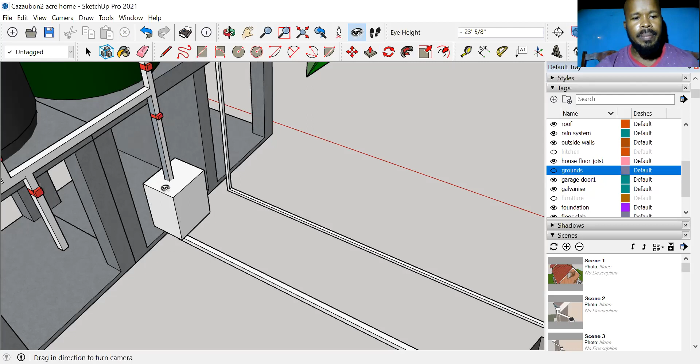So if you're going to run it through a charcoal and sand filter, then you would need to have some kind of device to pull the water through the filter, or some device to push the water through the filter. So then it is possible to adapt it and have a filter on that system. Yep, so right, actually appreciate that.

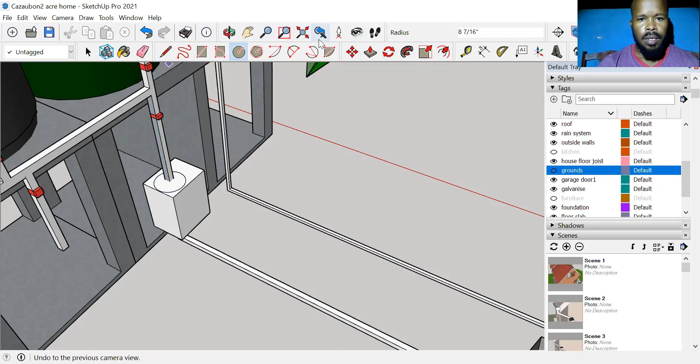My question was about switching out, using the model you have here, from the third tank into that higher tank. Is it possible to use a manual pump to get that water up there? Yes, you can. You could get a solar pump - they have solar pumps you could use. But they also have manual pumps that can get the water up there for sure. Just look for manual water pumps. You could actually build one yourself. If you check on YouTube... it just slipped me that I didn't add it to the presentation, but yes, it's possible to build one as well.

But you can add a filter on the system. I just kind of drew one there, so that's a filter - you can add a filter on the system. All right, great, thanks a lot man. Appreciate it.

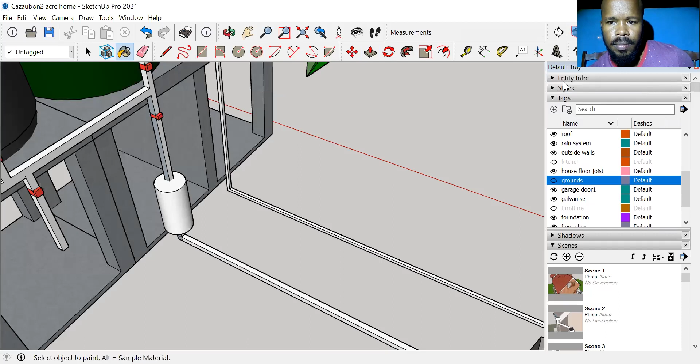It has to be important to know that with that 1,000 gallon or 800 gallon tank, that is 8,000 to 10,000 pounds. That structural support has to be ready to deal with that, because that is like building another house there, so you know.

That is so true, and so you have to maximize. If you're thinking about going to the country, and I understand what you're trying to do - you're trying to educate us on the various variables - but with that situation there, with that weight on top, would you advise putting in the proper structure to live underneath that at all? No, that's why it's away from the house. No, you don't live under that.

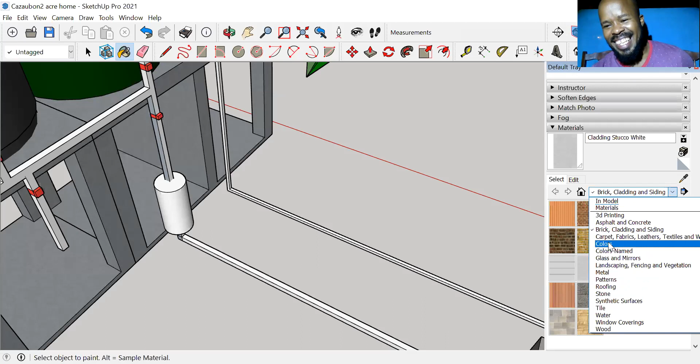No, I wouldn't live under that at all. Yeah, that's why I have it away from the house. Nah, I wouldn't, unless I'm desperate, really. I would really structure it that way. It can be done, but I'm just saying you have to be cost effective when dealing with this. But I believe it's best to have your water away from the house. The other reason too, if there's a fire, you don't want the first thing to go with the house to be the water. You want to be able to have that water help you out with whatever fire is on the property. So having the water away from the house is a very good practice.

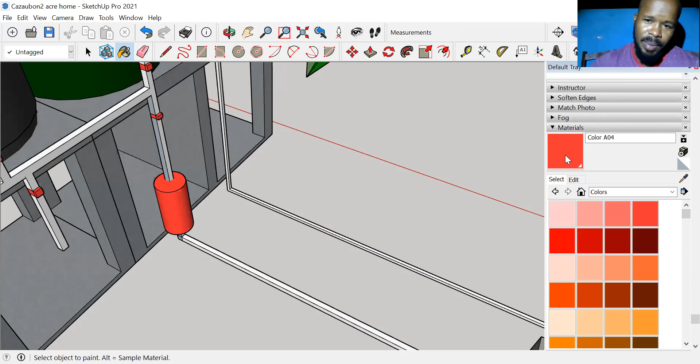Although a lot of us put water on the roof, that is using pumps and everything - the water is already pressurized so we can get it onto the roof. But if it's gravity, you would have to put in that pressure that you were looking for.